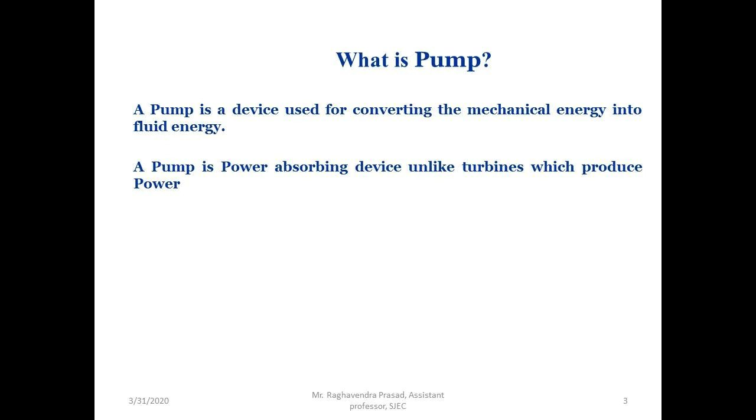Pumps can be classified into three major groups according to the method they use to move the fluid: direct lift, displacement, and gravity pumps. Pumps operate by some mechanism, typically reciprocating or rotary, and consume energy to perform mechanical work for moving the fluid. Hence, a pump is a power absorbing device, unlike turbines which produce power. Pumps operate via many energy sources, including manual operation, electricity, engines, or wind power. They come in many sizes, from microscopic for use in medical applications to large industrial pumps.

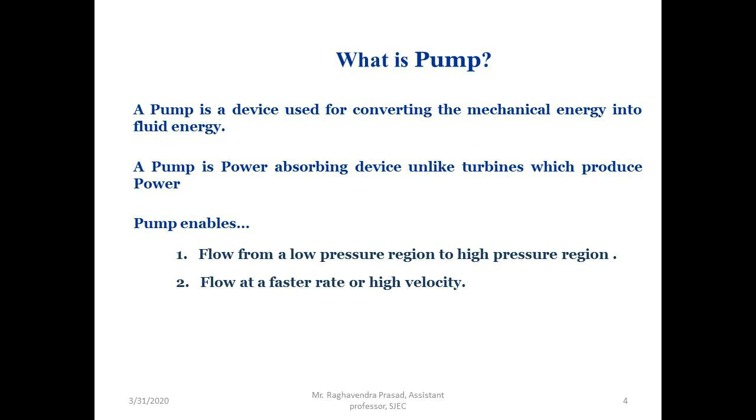Pumps are used for two main purposes. One is for flow from a low pressure region to a high pressure region, and second is flow at a faster rate or at high velocity.

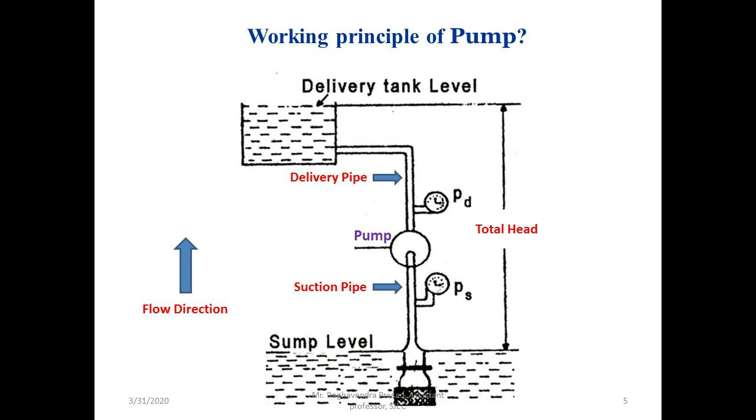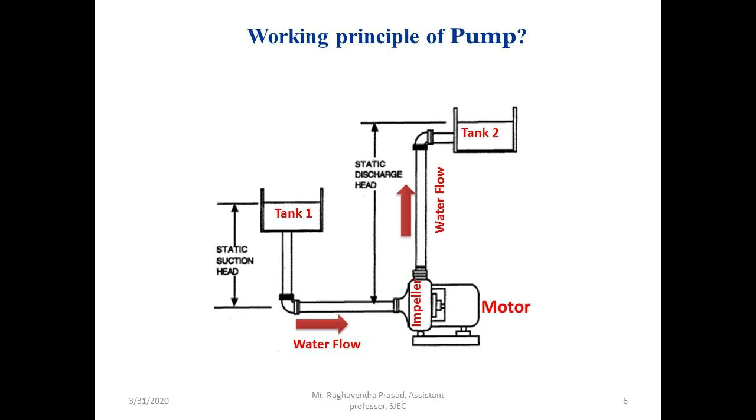Specifications of a pump. First is power consumption in horsepower, example half HP, full HP, 2 HP, etc. Pumps are selected based on the head requirement, that is the height to which the fluid must be lifted. As the height requirement increases, the power consumed by the pump also increases, hence power consumption is a very important parameter to consider while purchasing a pump. If the selected pump is half HP, then it consumes power of 0.37 kilowatt.

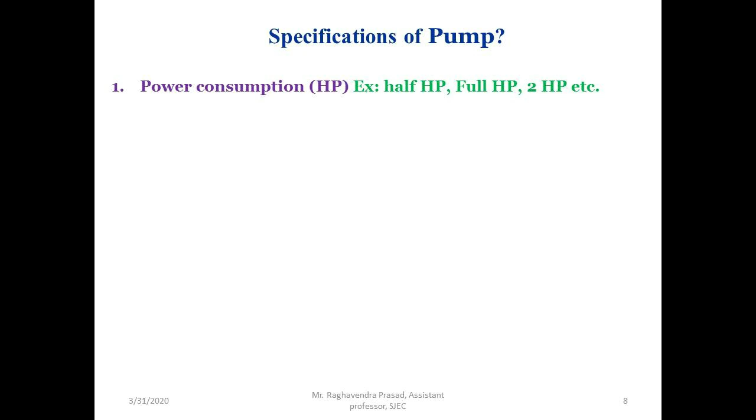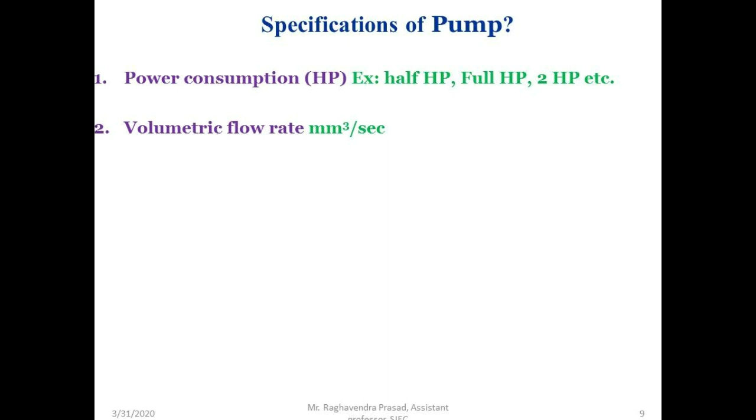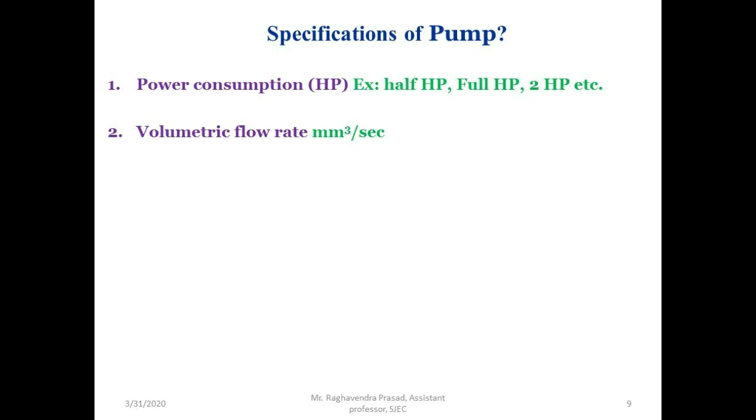Second important specification is volumetric flow rate in millimeter cube per second. Volume flow rate, or volumetric flow rate, is also referred to as the capacity. It is the volume of fluid that travels through the pump in a given time. It defines the rate at which the pump can push the fluid through the system.

Third is suction and discharge pressure. The unit is either bar or Newton per meter square, or Pascal. Suction pressure is less than atmospheric pressure and is responsible for the upward flow of fluid into the pump, whereas delivery pressure is the addition of fluid pressure and suction pressure, responsible for the upward flow of fluid till the delivery tank. Generally, the discharge pressure is greater than the suction pressure.

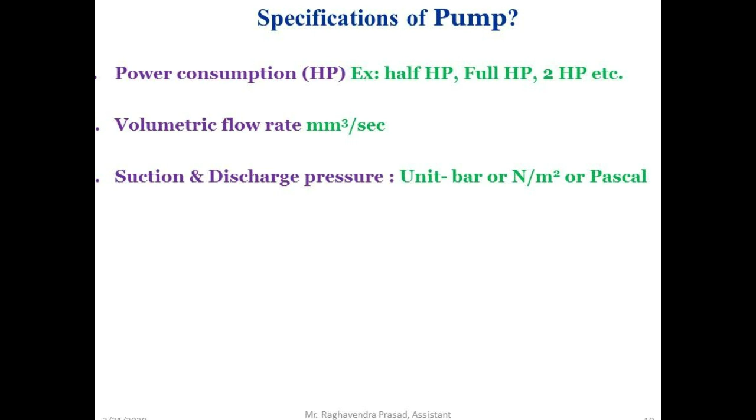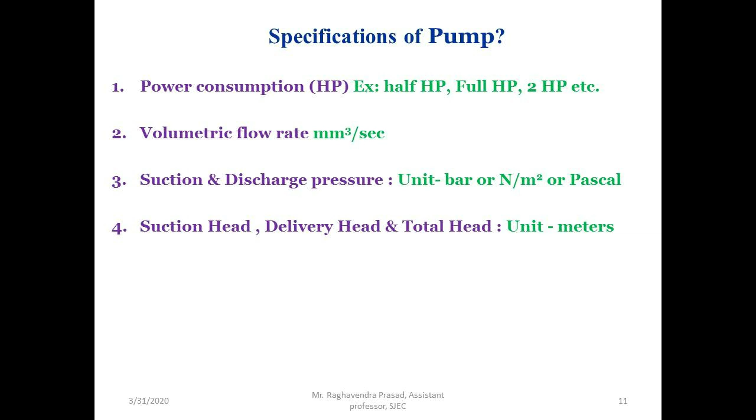Fourth specification is suction head, delivery head and total head, with unit in meters. The suction head, as the word says, is the height of the pump from the sump. It is called height but defined in bar, which is the unit of pressure. The delivery head is the height a pump can pump up water. The total head is the maximum pressure a pump can produce, which is the sum of suction and discharge head.

Fifth specification is efficiency. In this, many subclassifications exist, like hydraulic efficiency, mechanical efficiency, volumetric efficiency, manometric efficiency, etc. Efficiency is the measurement of utilization of power consumed by the pump in lifting water against gravity and the frictional resistance within the pump.

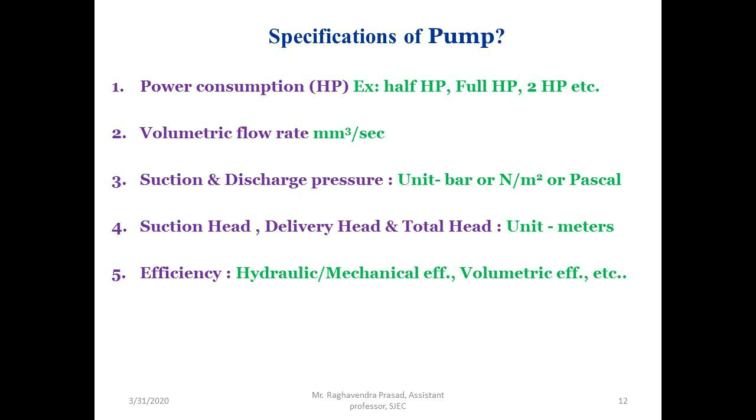Classification of pumps: pumps are broadly classified into two types. One is turbomachines or rotodynamic pumps, in which rotational movement of the pump is converted into fluid energy. Second is positive displacement pumps, in which the fluid is compressed and the pressure and velocity of the fluid is increased when the fluid leaves the pump. Subclassifications are given in the flow chart.

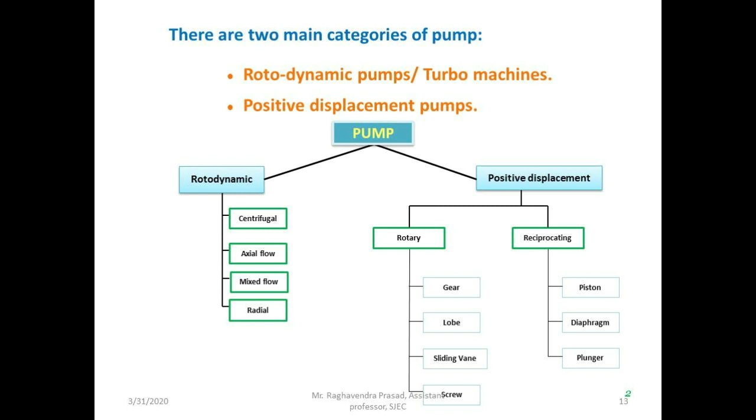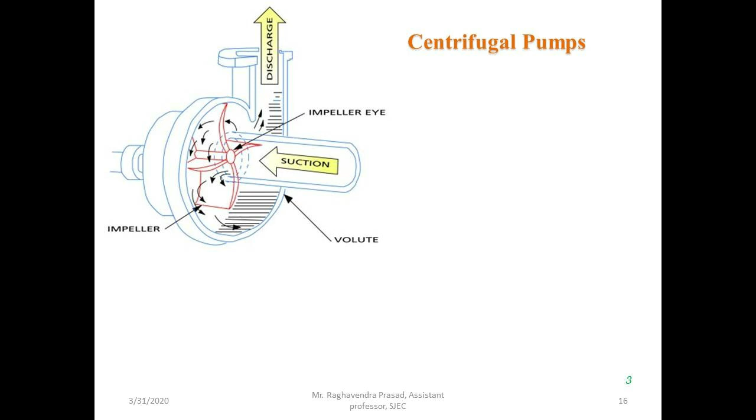Centrifugal pumps: centrifugal pumps are used to transport fluids by the conversion of rotational kinetic energy to the hydrodynamic energy of the fluid flow. The rotational energy typically comes from an engine or electric motor attached to the pump. In these pumps, centrifugal force is used for the fluid flow in order to energize the fluid, and rotational energy converts into fluid energy. Hence they are called rotodynamic pumps. Common uses of centrifugal pumps include water, sewage, agriculture, petroleum, and petrochemical pumping. Centrifugal pumps are often chosen for their high flow rate capabilities.

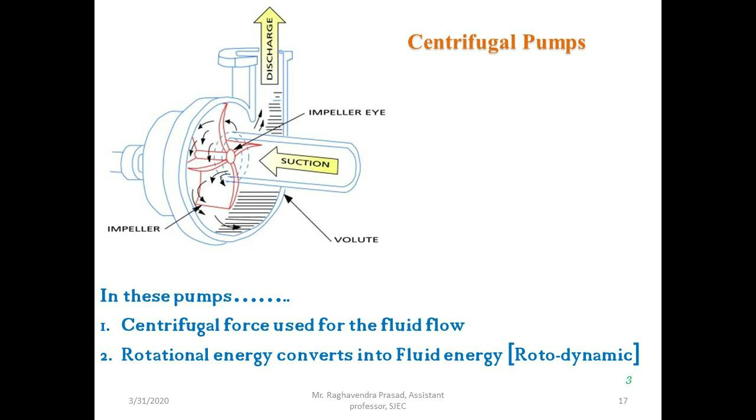Construction of centrifugal pumps. The major parts of centrifugal pumps include casing, impeller, suction side, and delivery side. Casing is a cover which houses the impeller.

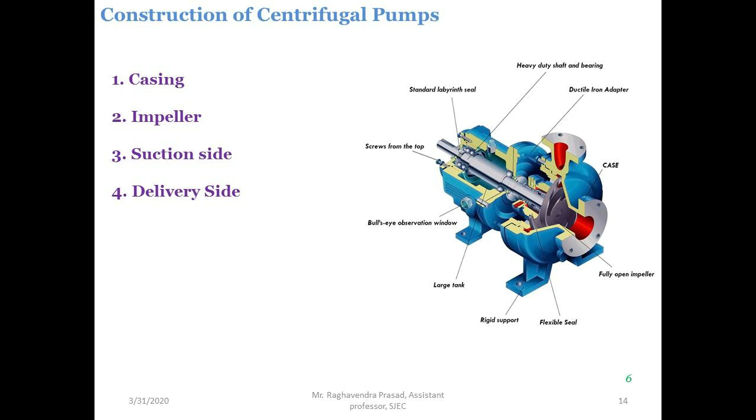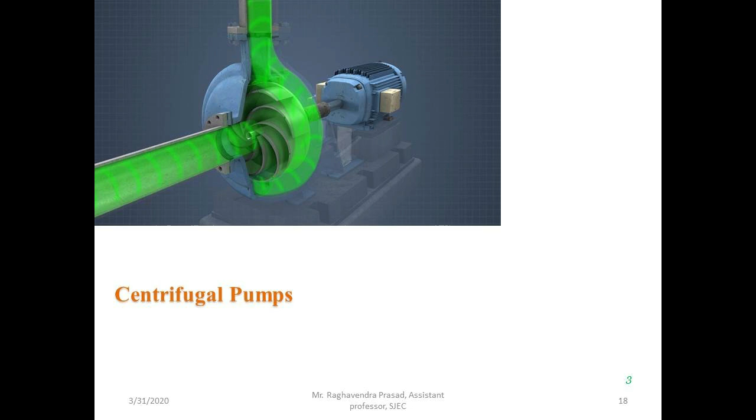Impeller is a rotating element connected to the motor shaft, inside the casing. Volute casing is the most commonly used casing for centrifugal pumps. Impeller is a wheel or rotor provided with a series of backward curved blades or vanes. It is mounted on the shaft, which is coupled to an external source of energy that imparts energy to the liquid.

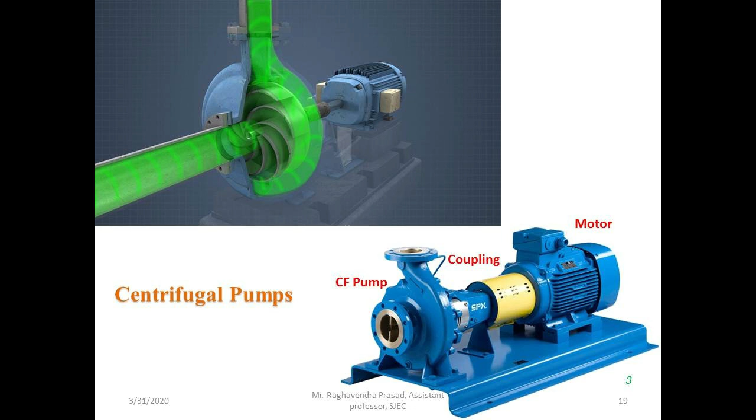Impellers are divided into three types. First, open impellers are used in small pumps to supply thick fluids like slurry, mud, oil, and crude oils in refineries and power generation plants.

Semi-closed impeller has an additional back wall, giving it more strength. These impellers can pass mixed solid-liquid mixtures, at the cost of reduced efficiency.

Enclosed impellers are generally used in large pumps and clear water applications. The construction of closed impellers includes additional back and front walls on both sides of the vanes, enhancing strength. This also reduces thrust load on the shaft, increasing bearing life and reliability, and reducing shafting cost.

The suction pipe is connected with the inlet of the impeller, and the other end is dipped into the sump of water. At the water end, it consists of a foot valve and strainer.

The foot valve is a one-way valve that opens only in the upward direction. The strainer is used to filter unwanted particles present in the water to prevent the centrifugal pump from blockage.

Delivery pipe is connected at its lower end to the outlet of the pump, and it delivers the liquid to the required height. Near the outlet of the pump on the delivery pipe, a valve is provided which controls the flow from the pump into the delivery pipe.

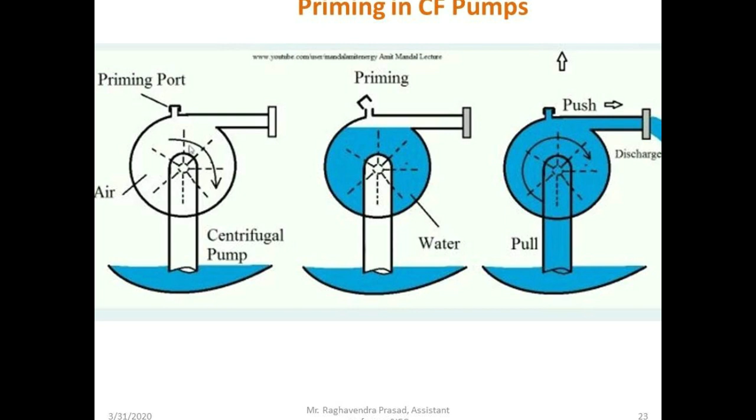Working of centrifugal pump. The first step of operation is priming. Priming is the operation in which the suction pipe and casing of the pump are filled with the liquid to be pumped, so that all the air from the pump is driven out and no air is left.

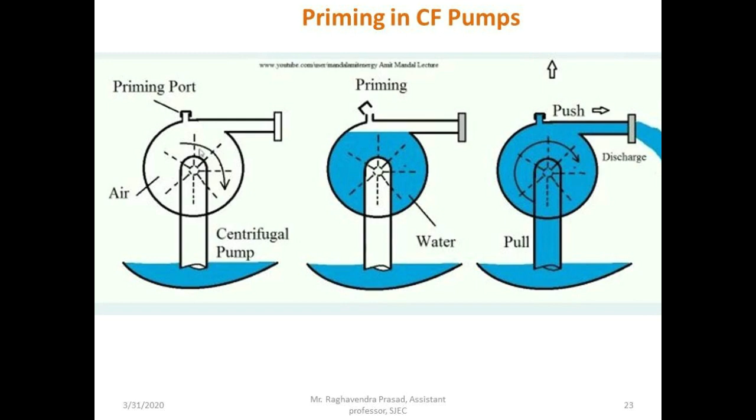The necessity of priming a centrifugal pump is due to the fact that the pressure generated at the impeller is directly proportional to the density of the fluid in contact with it. If the air is not removed, since it has low density compared to water, the water will not flow upward in the suction pipe.

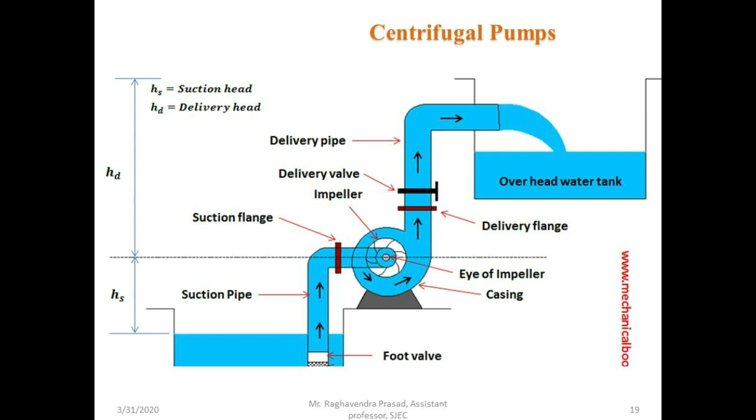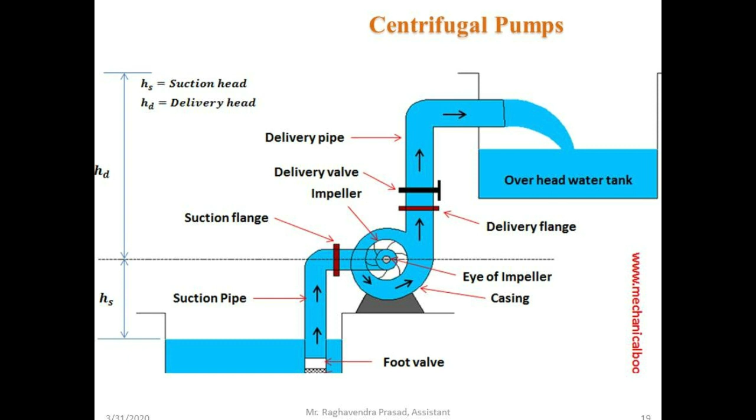The electric motor is started to rotate the impeller. The suction created thus lifts the water into the pump casing, where due to the centrifugal action of the impeller, the fluid is thrown away from the eye of the impeller. This centrifugal action increases the velocity and pressure, and with this high energy, the fluid can flow upward into the delivery tank.

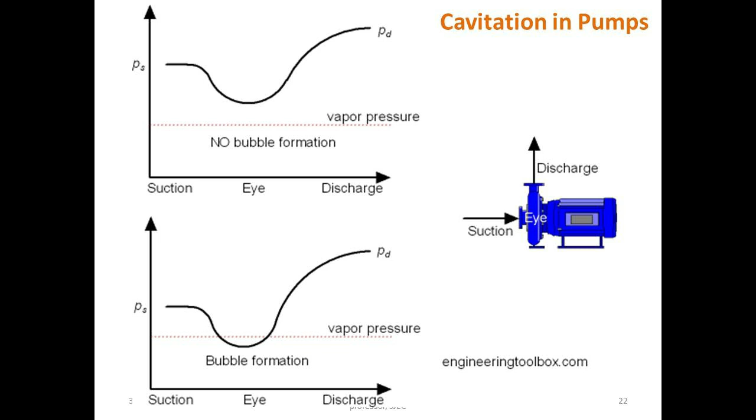Cavitation in pumps. Cavitation is a process in pumps where the pressure of the fluid falls below the vapor pressure. Vapor pressure is the pressure at which the liquid starts to boil. So at this stage, when the pressure falls below the vapor pressure, the water boils off.

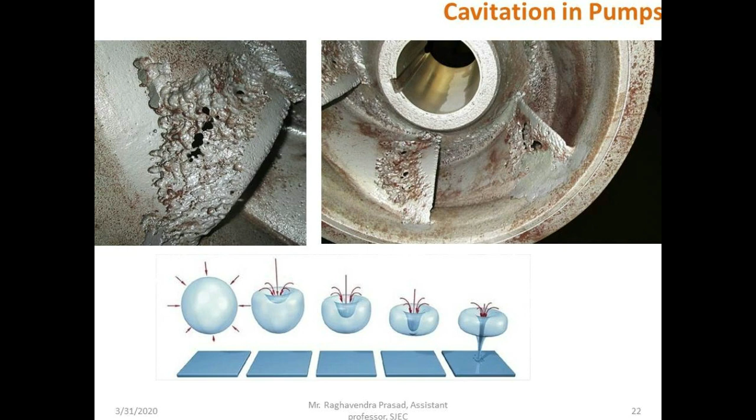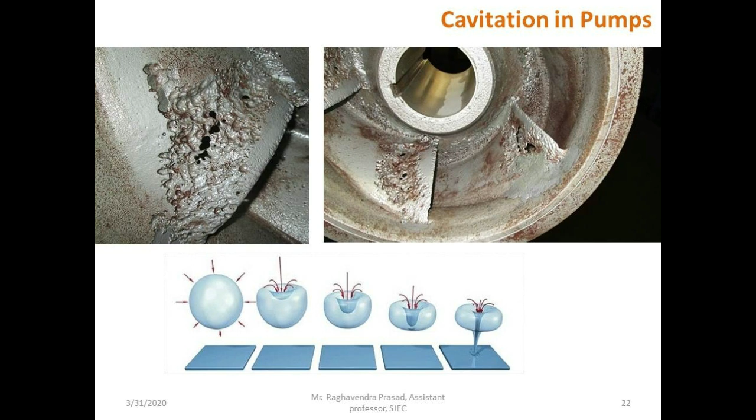This results in the formation of bubbles. These bubbles are then acted upon by high pressure fluid surrounding them in the impeller, causing the bubble to implode. The implosion creates a shock wave that hits the impeller and other parts of the pump casing, creating pump vibration, mechanical damage, and possibly leading to complete failure of the pump at some stage.

Reciprocating pumps. A reciprocating pump is a class of positive displacement pumps. It is often used where a relatively small quantity of liquid is to be handled and where delivery pressure is quite large. In reciprocating pumps, the chamber that traps the liquid is a stationary cylinder containing a piston or plunger.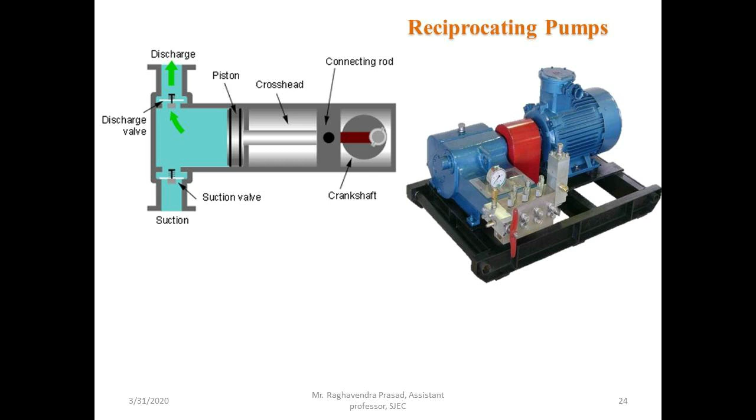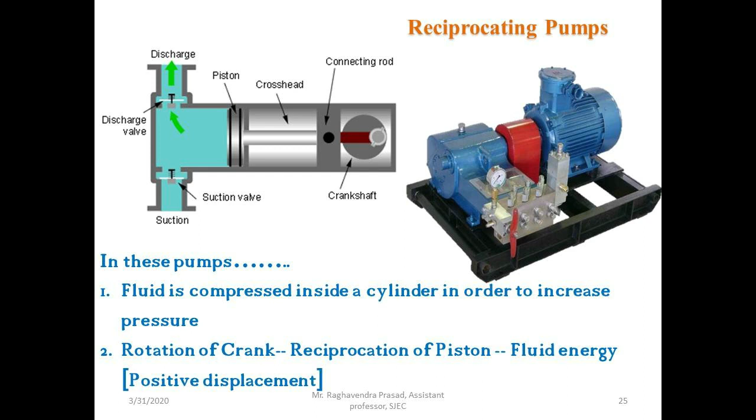In these pumps, the fluid is compressed inside the cylinder to increase pressure using the cylinder-piston arrangement. Also, rotation of the crank is converted into reciprocating motion of the piston, which is then converted into pressure energy of the fluid. Hence, it is called a positive displacement machine.

Components of reciprocating pumps are as follows. Piston or plunger: a cylindrical disc of small thickness that reciprocates in a closely fitted cylinder. Crank and connecting rod mechanism, operated by a power source.

The power source gives rotary motion to the crank. With the help of the connecting rod, this rotation translates into reciprocating motion of the piston.

The suction pipe remains deep in the liquid, and the other end of this suction pipe is connected to the inlet portion of the cylinder, whereas the delivery pipe is attached to the delivery part of the pump, with the other end at the discharge point. Suction and delivery valves are provided at the suction end and delivery end respectively.

These valves are non-return valves, meaning they don't allow the backflow of fluid into the sump. The working principle of the reciprocating pump is as follows. Initially, both the suction and delivery valves are in closed position.

When the power source, that is the motor or engine, is connected, the crank starts rotating and the connecting rod also displaces along with the crank. The piston connected to the connecting rod will move in a linear direction.

If the crank pulls the piston, a vacuum is created inside the cylinder. This vacuum opens the inlet or suction valve and draws water into the cylinder.